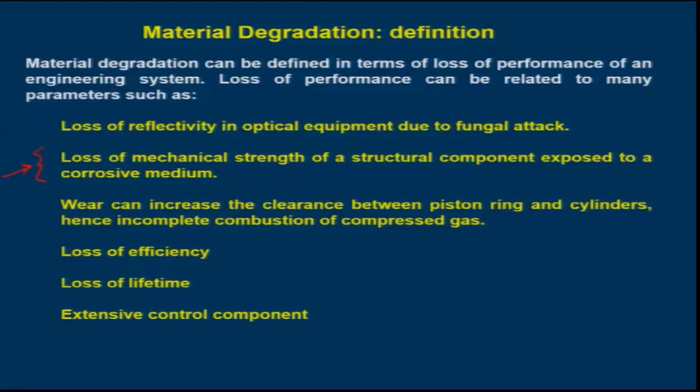Now, if we come to the reasons or phenomena that can cause material degradation, there could be anything available in the environment, because every time any material we use, we have to expose it to the environment - like heat, light, short wavelength electromagnetic radiation, radioactive emission, chemical, mechanical stress and interactions with bacteria, fungi or other life forms. So all these factors will be the reasons for some way or other of material degradation.

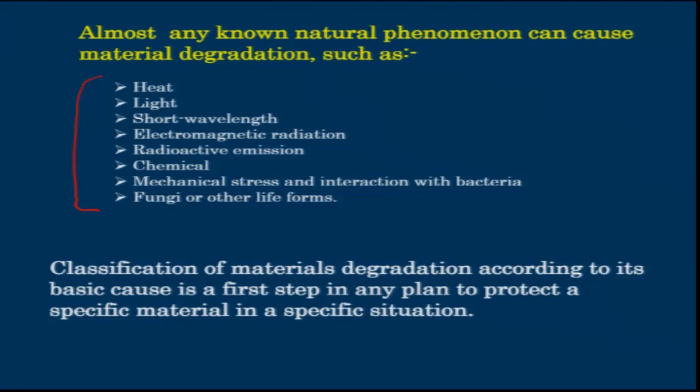Hence, the classification of material degradation according to its basic cause is a first step in any plan to protect a specific material in a specific situation. That is what we have been talking about.

Now, coming to materials and environments - if I see materials, the first thing that comes to a material scientist is basically the material tetrahedron. In the material tetrahedron, for example if I draw it, this is a kind of material tetrahedron we see, where structure is one side.

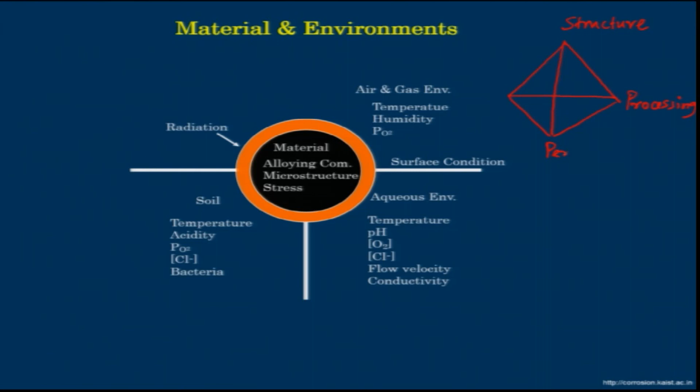Then processing, then performance, and then properties. Now, when we talk about this material tetrahedron, in the structure we can also have one more criterion, which is called composition. For a particular composition, this structure, properties, performance, processing - all are interrelated.

So this is a classic material tetrahedron. Now, if I come to this particular picture of the material tetrahedron, we have made some material for performing some duties. For example, in some cases we need to hold a particular load, in some cases we need to have a kind of protection against corrosion.

Or we need to prepare material where wear can be protected, wear can be resisted - all sorts of things. Now, if I consider materials, this is coming under this. Alloying compositions come under composition, one particular field of the material tetrahedron. Microstructure comes under structure again.

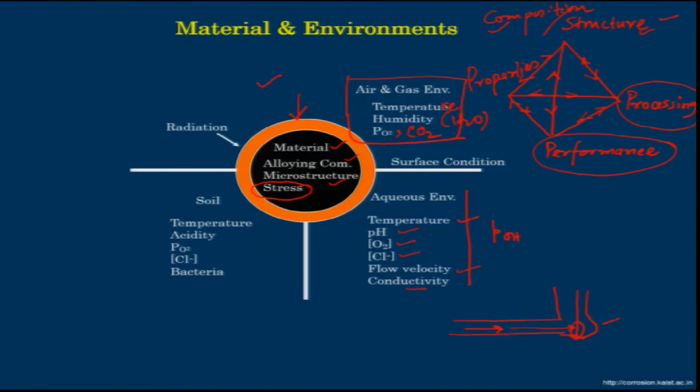Conductivity is also important. If something is placed in water that contains very little amount of conducting ions, apart from the hydrogen ion and OH ion present due to dissociation of H2O, that material would corrode little less compared to water containing some iron ion or chlorine ion. In that case, it will be hugely corroded.

Now coming to the soil, moisture is an important factor, acidity is an important factor which is H plus ion concentration, partial pressure of oxygen, and chlorine ion content. There could also be a possibility of bacterial attack on the materials.

So now coming to surface condition - this means if something is exposed to the gaseous environment or air environment, and below that if it is within the soil, in the water medium, or in other liquid chemicals. Now coming to radiation, this is also another factor which can lead to problems on the materials. So this is the relation between materials and environments, which is not a very friendly relationship - they are always trying to attack the materials.

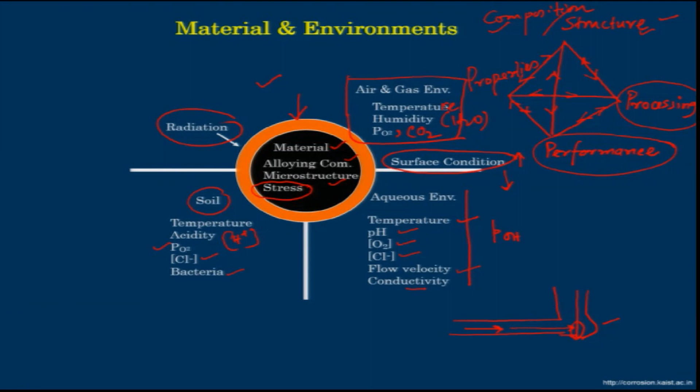Now, the corrosion part - let us forget about corrosion for the time being. Let us say how do we get iron. First we generally make iron in a blast furnace, and in the blast furnace it is basically a reduction process, where we reduce iron ore, which is in the form of FeO, Fe3O4, or Fe2O3. These three iron oxides are reduced by carbon. That is what we always have - iron containing carbon. If that carbon presence is below 2% or 1.8%, we call it steel, and beyond 2% carbon, in weight percent, it will be called cast iron. This is coming from the production route, which is the blast furnace. There we do reduction, and then after reduction we send it to another plant called the steel making plant.

In the steel making plant, we actually do oxidation, because once we form iron from the blast furnace, it is generally called pig iron. That pig iron contains many impurities, and those impurities are to be taken care of or removed by oxidation.

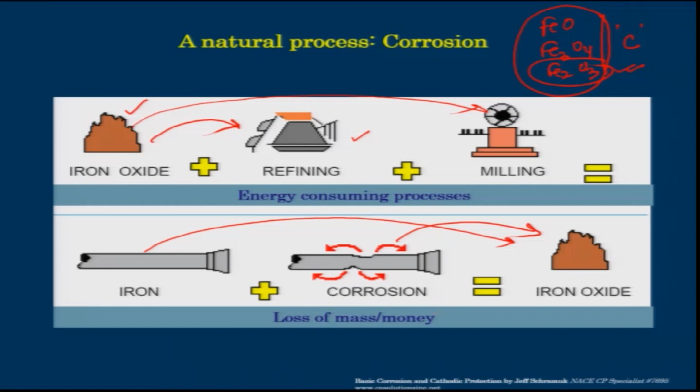Now coming to the definition, there are two definitions. One is the practical definition: the tendency of a metal to revert to its native state. If you see the previous slide, we are taking iron from iron oxide, and now we are reverting iron to iron oxide. So the second process is a natural process, the first process is energy consuming. Of course, when that happens, there will be loss of mass and loss of money. So this is the practicality in it—the tendency of a metal to revert to its native state. Native state means iron oxide or iron ions, those are native states.

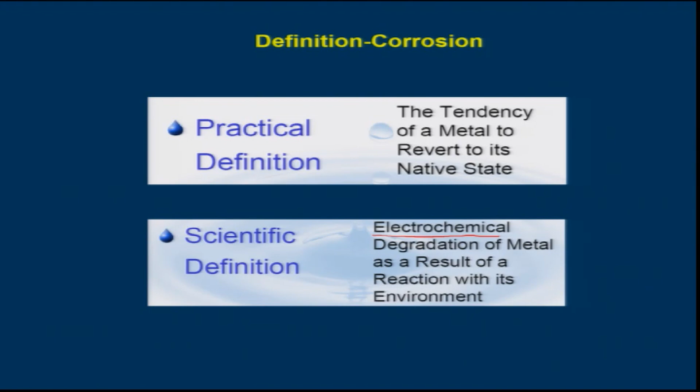The scientific definition: electrochemical degradation of metal as a result of reaction with its environment. Here, interestingly, we are using electrochemical, not chemical. Whenever we talk about corrosion related degradation—corrosion is of course a degradation, wear is also a degradation—but when we talk about corrosion, we must consider that the metal is reacting with its environment electrochemically. That means there is a formation of metal ions, so metal atoms go into ions. That is the scientific definition of corrosion.

Continuing the definition of corrosion: the destructive attack on a metal by electrochemical reaction with its environment, as we have mentioned. Corrosion returns the metal to its oxidized state or combined state in chemical compounds that are similar or even identical to the materials from which the metals are extracted. So in this definition, we are combining both the practicality and the scientific part of it. The first part, attack on a metal by electrochemical reaction with its environment, is the scientific part, and the second part, corrosion returns the metal to its native condition, combines both.

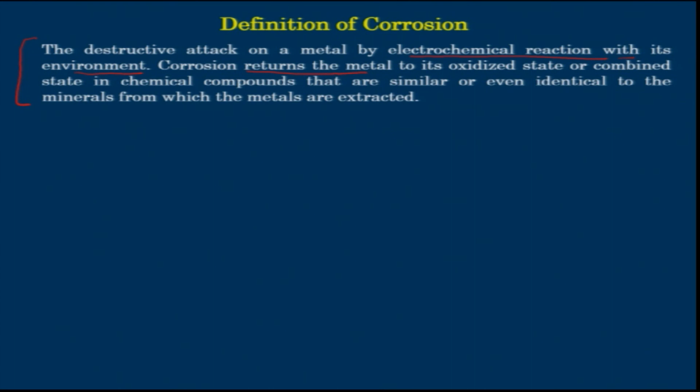Now, since we have started talking about electrochemical reaction, gradually we will get into the electrochemistry. So now let us see this aqueous corrosion of zinc in dilute HCl. Let us go to the aspect of zinc corrosion. Let us say we start with this particular thing: zinc corrosion in dilute HCl.

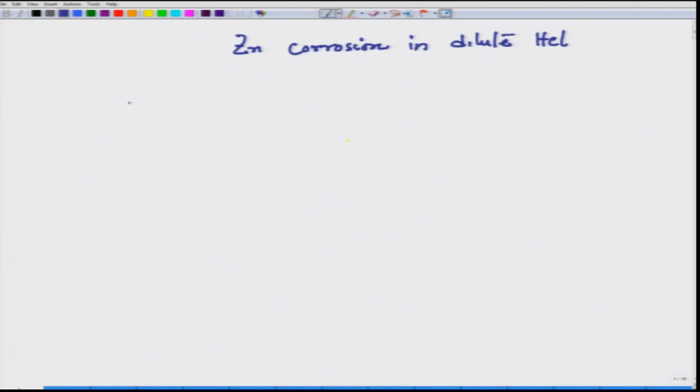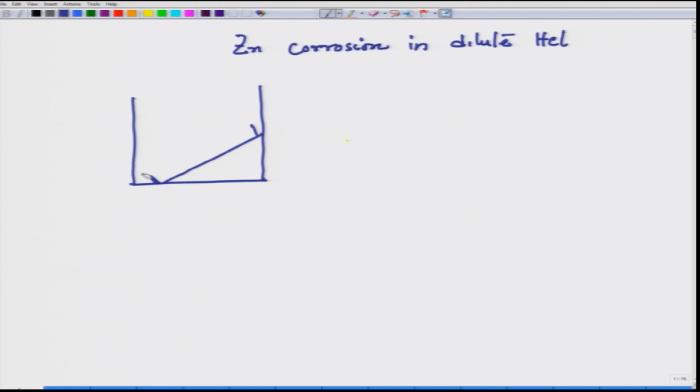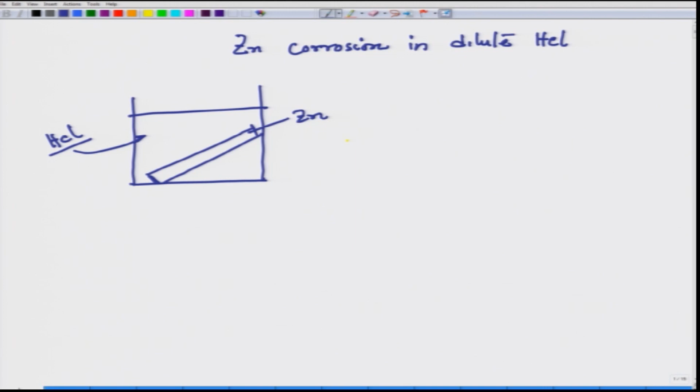Now, if we have a container, and in that container we put a bar of zinc, and we have dilute HCl here. Once we put in zinc, you will see bubble formation on the zinc surface, and those bubbles are coming out, with vigorous bubble formation.

If we take this particular bubble, encapsulate this section, and then finally burn a matchstick near it, you will see that it gets burnt. So, this particular gas coming out is nothing but H2 gas.

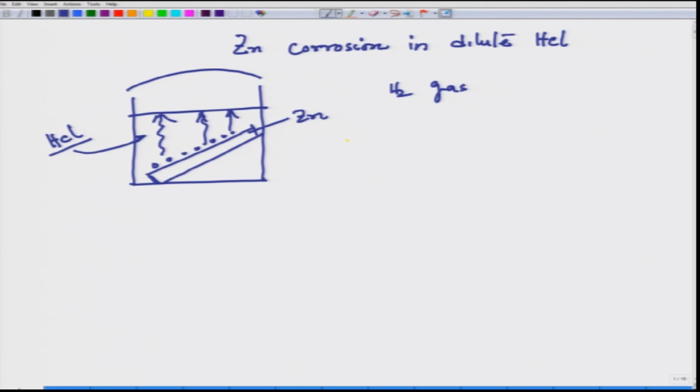Now, if we see the reaction: zinc plus HCl equals zinc chloride plus H2, and if we balance it, this is the balanced equation.

Now, we wondered where this electrochemistry is taking place. We said an electrochemical reaction must happen, because zinc, which is in metallic condition, is now going in the form of zinc chloride, dissolving in that solution, and hydrogen gas is coming out. But if we break this reaction into two parts, you would definitely see that yes, there are electrochemical reactions.

If we look at zinc, if we take 2 electrons out of zinc, it goes to zinc 2+ ions. Since these 2 electrons are coming out from the zinc atom, they need to be taken up, because charge cannot remain unbalanced. Now, in HCl you have H+ and Cl- if we dissociate it. So these H+ will take up 1 electron and form H, and if we consider 2 H+ ions, so 2 atomic hydrogen combine with each other and form H2 gas.

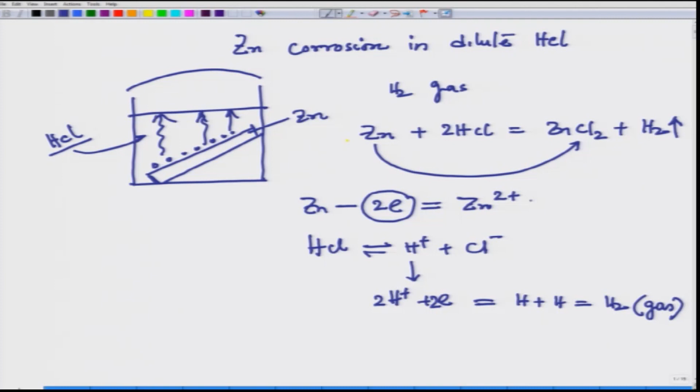Now, this reaction is nothing but the anodic reaction, or we call it the oxidation reaction, and this other reaction we call the cathodic reaction, or reduction reaction.

Now, whenever there is an anodic reaction or oxidation reaction, it talks about material degradation. That means the zinc atom is going into solution, so this zinc rod is gradually losing zinc. This degradation is happening because this reaction is electrochemical. These 2 electrons released by zinc are taken up by 2 hydrogen atoms forming hydrogen gas. So in this entire reaction we have 2 electrochemical reactions taking place: one is anodic, another is cathodic.

Now, the question is, how do these 2 electrons move to the site of the cathodic reaction? Electrons must flow through a conductor, so it is flowing. For example, let us zoom into this small segment.

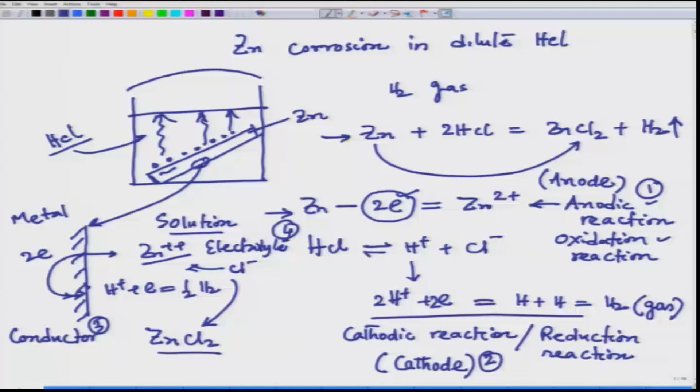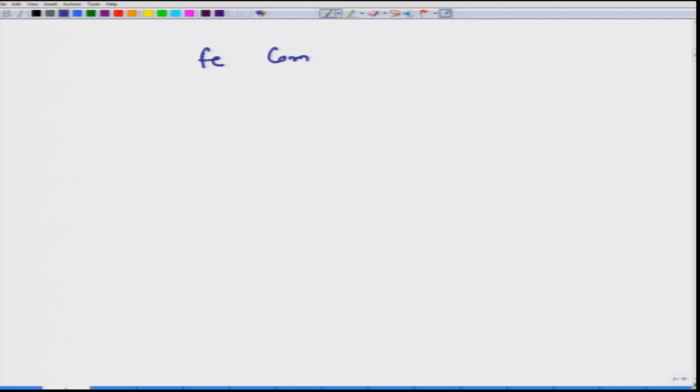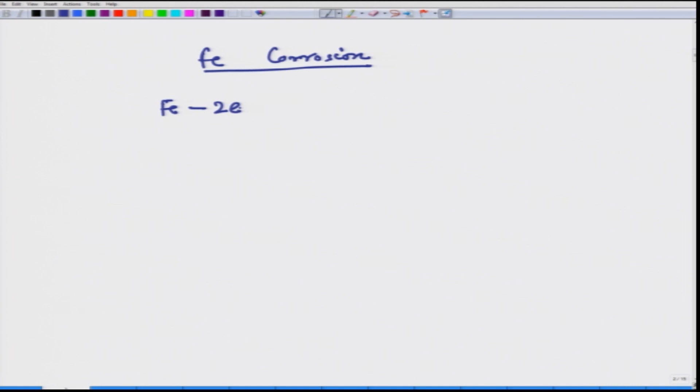Like that, if I look at the iron part, iron corrosion, iron of course, if it needs to corrode, it has to form ions. Now how can it form ions? It can lose 2 electrons and then go to +2, as we put this convention 2 plus. So this particular ion would then react with H2O and oxygen.

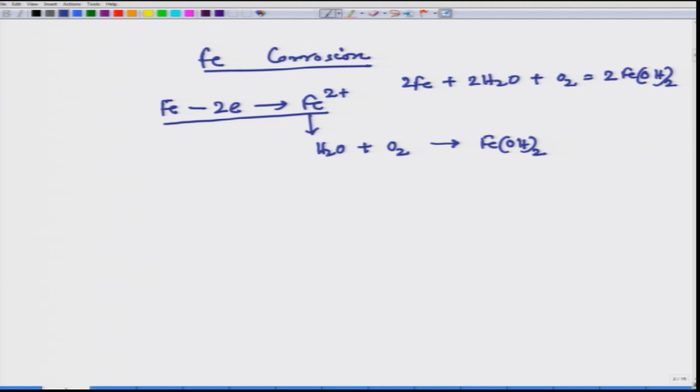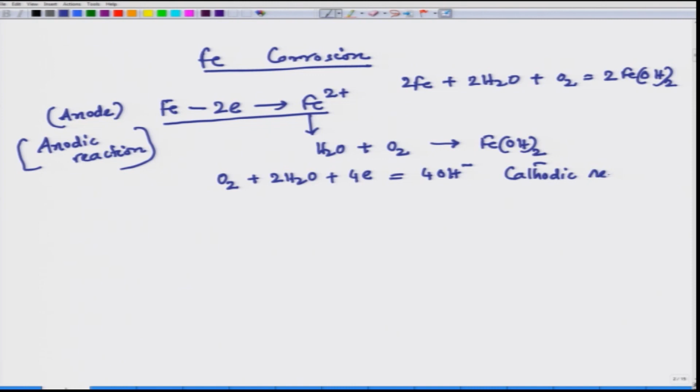Now where is the cathodic reaction taking place? We need to know that, and for this we also consider one more cathodic reaction: O2 plus 2H2O plus 4e equals 4OH minus. So this is the anode or anodic reaction, and this is the cathodic reaction or cathode.

Electrolyte is nothing but this, moisture becomes electrolyte. This happens when a metal object, an iron object, is exposed to the environment. This H2O becomes the electrolyte. Now, the electron flow happens here - these reactions happen on the anode, these happen on the cathode, and electron flows through the iron object, which becomes the conductor, and this becomes the electrolyte.

Now in the previous case also we could see that zinc itself is acting as cathode as well as anode, because the cathodic as well as anodic reactions are taking place on the zinc surface. Here also, the anodic surface as well as cathodic surface - iron is behaving in the same manner. Iron becomes cathode as well as anode.

Now, we will not be able to tell specifically this part is cathode and this part is anode, because in the beginning it will be all statistically distributed reactions. That means we can only say where the cathodic reactions happen and where the anodic reactions happen.

So if I try to see the formation of this, it also follows the same route, that means electrochemistry. Iron is dissolving by forming iron ion, and there is the cathodic reaction which is oxygen reduction - this oxygen is reducing, and cathodic reaction is nothing but reduction. In case of zinc, zinc ion is forming by the anodic reaction, and hydrogen ion is getting reduced and forming hydrogen. So that becomes my entire situation.

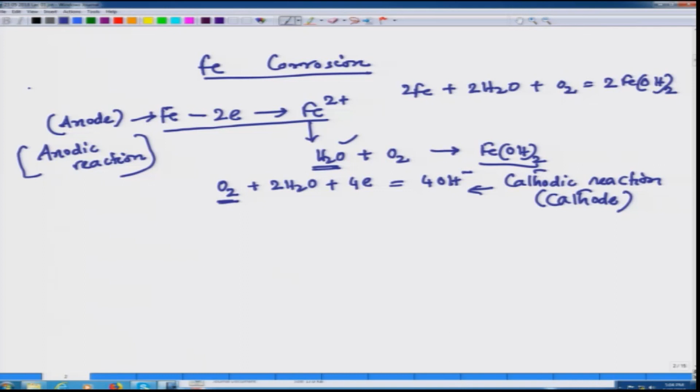Now before we end this lecture 2, I would like to tell you that of course corrosion is deadly, but in some cases corrosion actually helps. Let us give some examples. You would be surprised to see that in some cases, yes, corrosion actually helps. One classic example is the battery.

Now in the battery we of course have corrosive reactions. The carbon rod is acting as cathode, the zinc casing is acting as anode, and because the zinc case is corroding, it is releasing electrons, and that electron is flowing through this particular external circuit, external conductor, and that is what we are getting - a glowing light. So the battery is designed on the basis of corrosion, because zinc is corroding, that is what gives us electrons, and that is available for glowing lights.

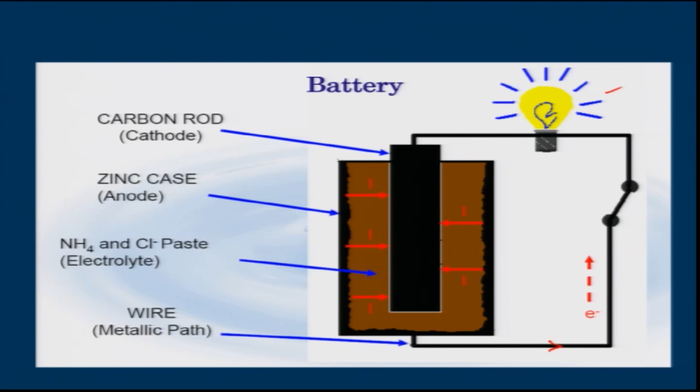Now this is another example - the microstructures, which is the bread and butter of material engineers, because these microstructures are needed to correlate property and structure.

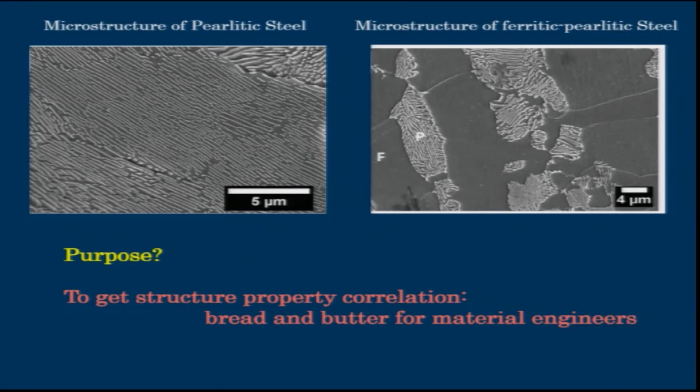Now another example is porous silver. There is porous gold, which are very good catalysts. They are formed by dealloying. For example, zinc-silver or gold-silver - if we form alloys, then we can take out silver in case of gold-silver, or we can take out zinc in case of silver-zinc alloy, and then form a porous network like this.

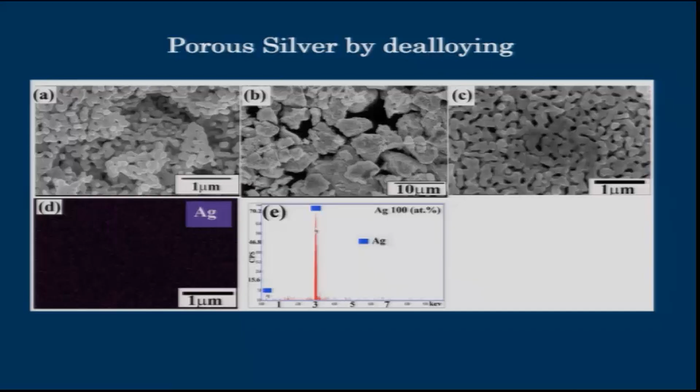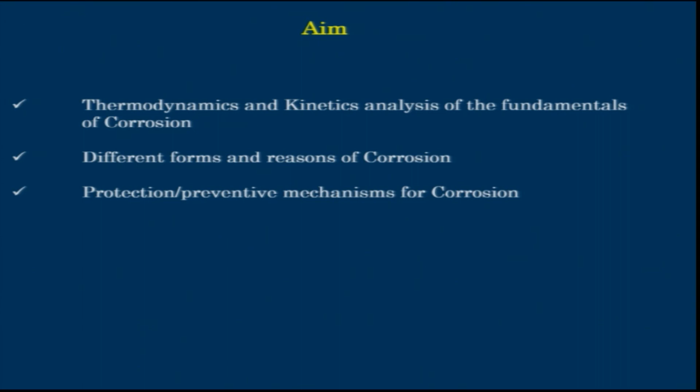So at the end, let me end this lecture by saying our aim is to understand the thermodynamics and kinetics of corrosion, different forms and reasons of corrosion, and finally we would look at protection and preventive mechanisms for corrosion. Thank you very much. Let us stop today. Thank you.